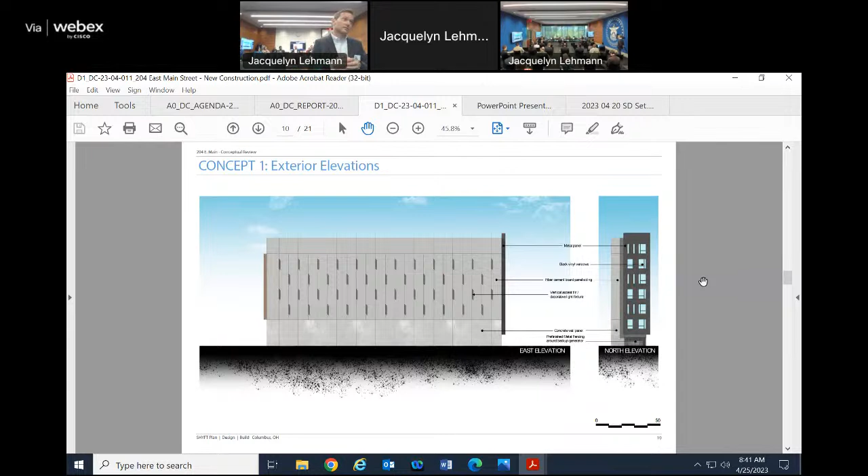So in lieu of being a static art piece, how do we do something here that changes throughout the seasons, throughout the day and night. The next slide would show a visual representation of how we could utilize different lighting concepts to activate this facade at night. The daytime view doesn't show shadow and depth, but this was the initial concept thought on that eastern facade where the firewall is.

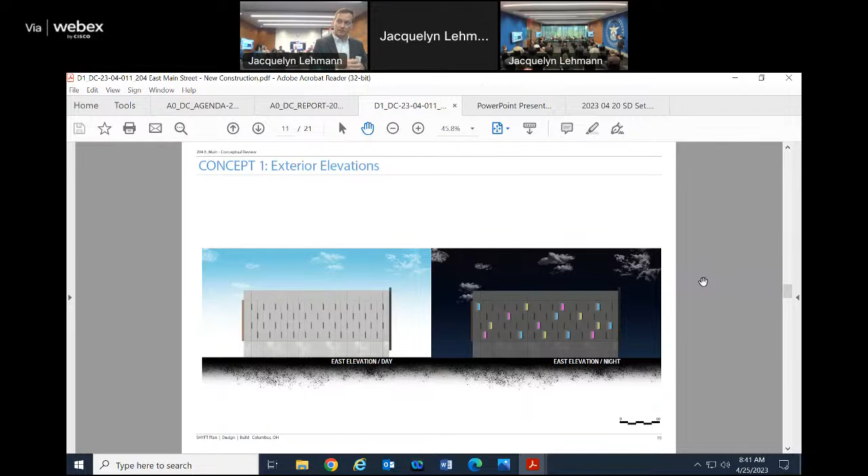This one utilizes a different rain screen that would be over top of the main building facade, basically pulling up and away from the building. This would be utilizing a series of composite materials - I think this would be a black composite type wood that's being pulled up off of the lighter fiber cement board underneath.

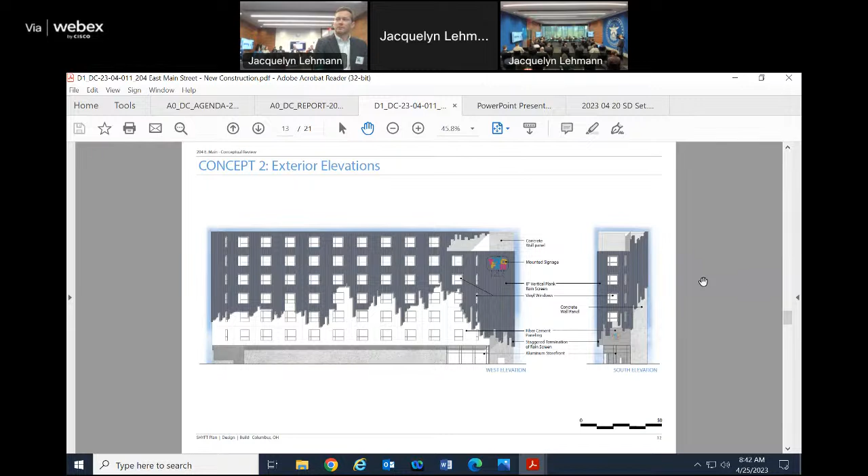As far as the building facade, concept, and how this is situated - it's the exact same floor plan, same 50 to 60 units available here, with the same location for amenity spaces on the upper floor and storage space on the lower floor.

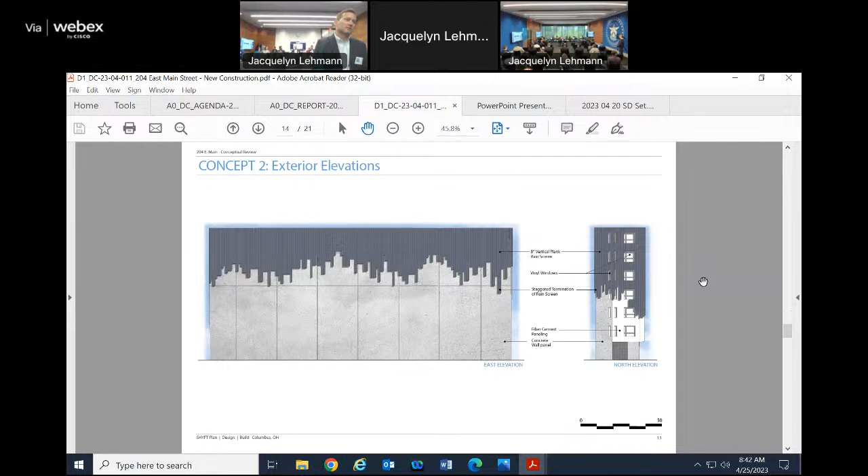This facade is again using the veil pulled up to try to create some sort of visual interest on this facade. And this had a similar application for the night view where we were looking to utilize lighting to try to activate that facade.

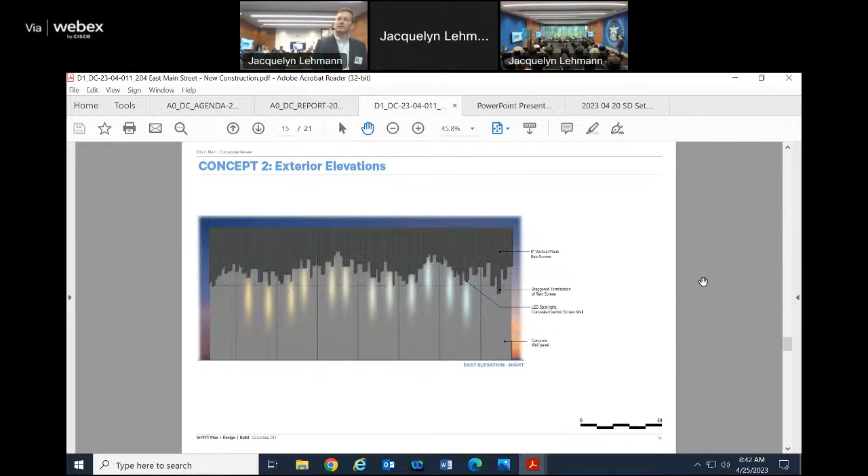Next slide. Another rendering of that view. And then these are just basic floor plans as you go up to the building.

Based off of staff comments, there were a couple additional items we wanted to comment on. On the first floor, speaking with our client, they would be plumbing this so that retail would be accessible at this level at some point. Knowing that Young is an alley, making sure we get safe pedestrian access and entrance off of Young Street would be something we'd need to work through. But the plan all along was this first floor space would be set up so it could be utilized for retail space and or storage.

I have already forgotten the second thing I wanted to mention based off of the staff comments. I have a question about what you just said, if that's okay, if I could ask that now.

Yes. It was interesting because when I looked at the plan, it looked like on that ground level floor, if you pushed those storage units back to the east wall, then you would have a corridor in the front, and that would allow you to maybe have some punched openings or even brick glass or something where you could activate that level. But it sounds like you have them at the west facade because you have that potential to use those as commercial space.

Correct. I do think in the upcoming months, in collaboration with staff and our client, we could work through an amenable solution where we might solve the pedestrian issue by pushing into the eastern facade, creating additional pedestrian access along that western component too. So yes, the plan was for that lower level to create some sort of amenity spaces and or retail. Other questions or comments for the applicant?

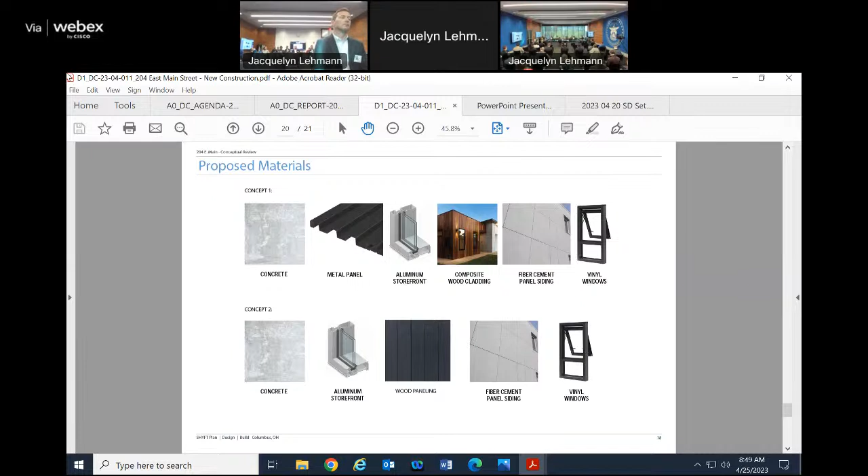And then on the west, if you decide you're not going to have retail, or the retail isn't accessed from the front, think about strategies where you could enliven that strip on Young. Because even though conceptually it's nice to have that monolithic base, in actuality it's a prominent facade and it's long.

So I think we want to have some kind of transparency there. Yeah, and I remember now what the second staff comment was, reacting to the comment about the eastern facade and us looking to activate it using something more integrated into the architecture, in lieu of a more static applied element, which is where we were trying to work with it. Our hope would be, in working with staff over the next several months, we could make sure we have a solution that would be acceptable to the commission.

Where's the right of way line on Young Street? Is it on the curb face or is it 3 feet back? I think it's 3 feet back, but I have to go back and look.

So you're proposing to put a bunch of plant material within the right of way? I know we were at the alley, and I unfortunately don't have that at the top of my mind right now. I know we've looked at the right of way line and the fact that we're coming from the middle of Young Street, but I can't remember exactly where that right of way is.

Yeah, I think to move the concept forward, you've got to figure out where that is and get with DPS. Yeah, we met with Structure Point previously to look at this as well, so it should be a relatively quick answer. I think we have looked at that, I just can't recall off the top of my head exactly where it lies.

Okay, very good. Are there other comments, thoughts, questions, anything? I was gonna add what Bob was getting to, that I think the lot line might be a hindrance on putting fins in, in theory. So at that point, we might just push — I prefer that — but otherwise it might be more of an artistic application.

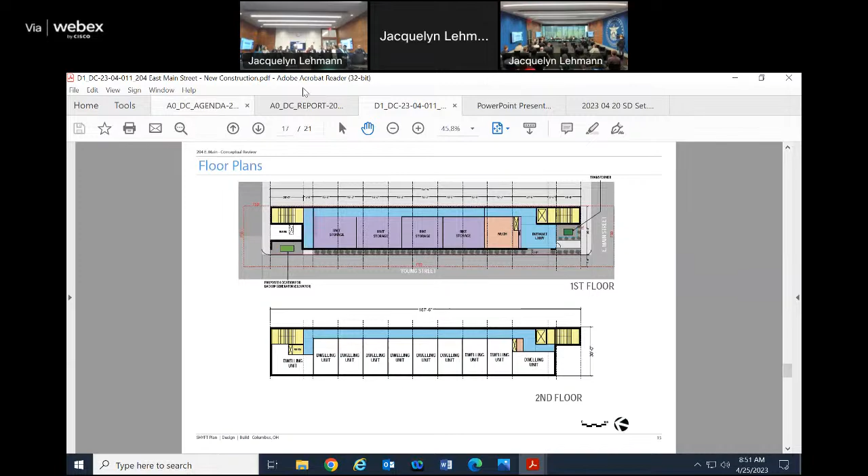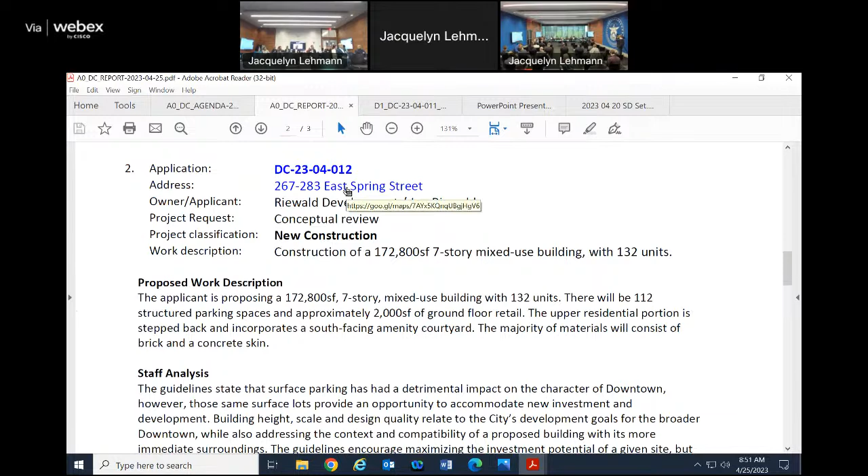Next case is at 267, 283 East Spring Street.

Pull that up here on the map for you. It is this surface parking lot at the intersection of Spring and Neilston. It extends to these two areas here. This that looks grassy is now gravel, but it does stop right here on the South Lafayette.

The applicant is proposing a 172,800 square foot, 7-story mixed-use building with 132 units. There will be 112 structured parking spaces and 2,000 square feet of ground floor retail.

The upper residential portion is stepped back and incorporates a south-facing amenity courtyard. The majority of the materials will consist of brick and concrete skin.

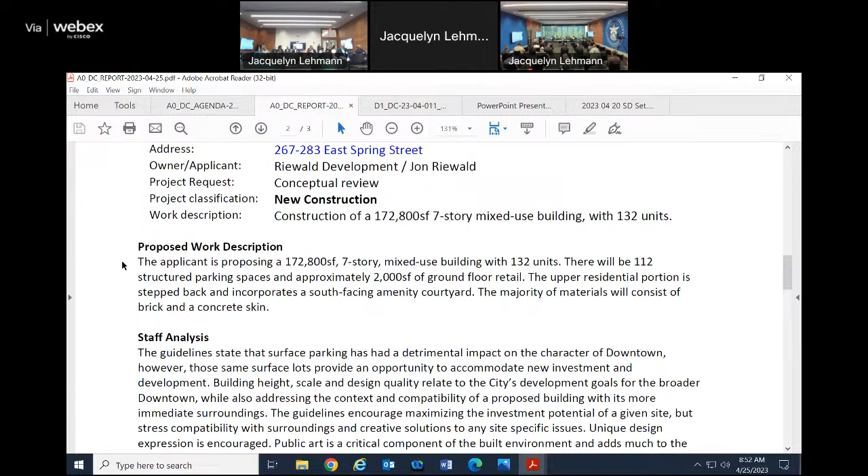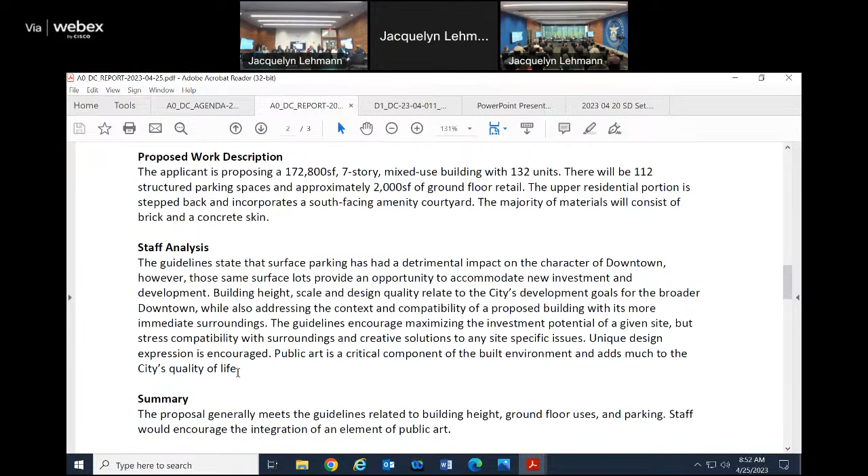The staff analysis, for the most part, is the same as the previous one, surface parking, and our development goals. I will say one additional thing: public art is a critical component of the built environment and adds much to the city's quality of life.

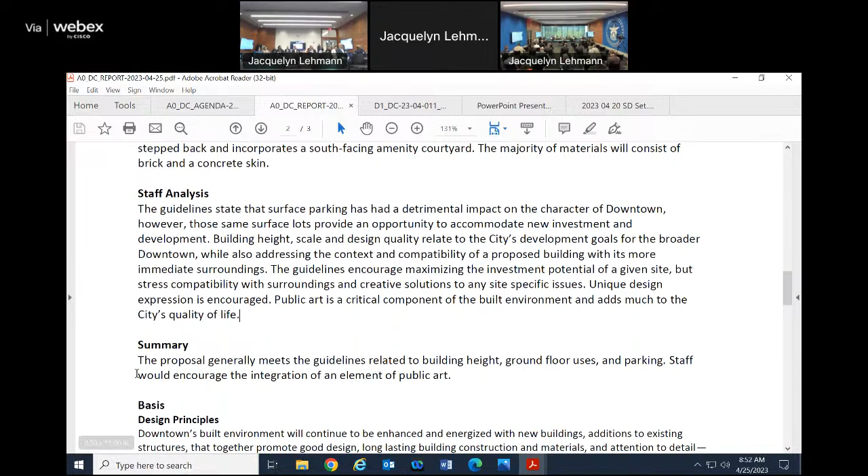So the proposal generally meets the guidelines related to building height, ground floor uses, and parking. Staff would encourage the integration of an element of public art in the proposal.

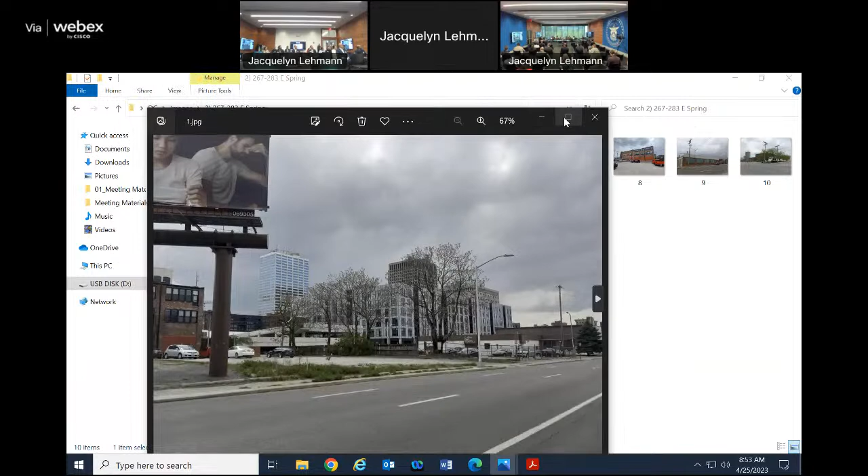And then I did take a site visit. I'll pull it up here. So this is the site looking southwest. See, it's this lot here and this lot here that's fenced in.

With that, we do have an applicant who's here to present.

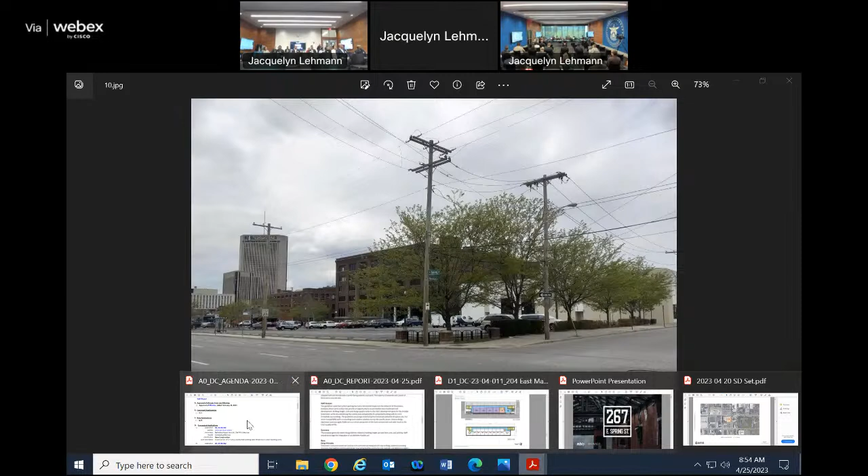Morning. Could you identify yourselves for the record, please? Yes, Jon Riewald with Riewald Development. And Mike Siriano with MBBJ. Great. Would you raise your right hand? You swear and affirm that the testimony you're about to give is the truth, the whole truth, and nothing but the truth? I do. I do. Thank you. How do I spell Siriano? S-I-R-I-A-N-O. Thank you. Okay, very good.

Awesome. Well, we're excited to be here and share more about what we're planning on Spring Street. I want to set the table briefly before I turn it over to Mike to walk through the design presentation. This area is really unique in that it's the intersection of multiple neighborhoods.

We've got the warehouse district to the north with its historic character. There's immense potential there and a mix of uses today. To the south, we have the Discovery District anchored by a growing resident base, some institutional anchors, Columbus State, CCAD, and some cultural institutions, and then an emerging entertainment and dining corridor on 4th.

Despite all of these good things happening around Spring Street, for as long as I've been in Columbus, it has stuck out as kind of a sore thumb, and development hasn't made its way there. So we're excited, and we believe our project's going to be catalytic and hopefully spur additional investment on this corridor.

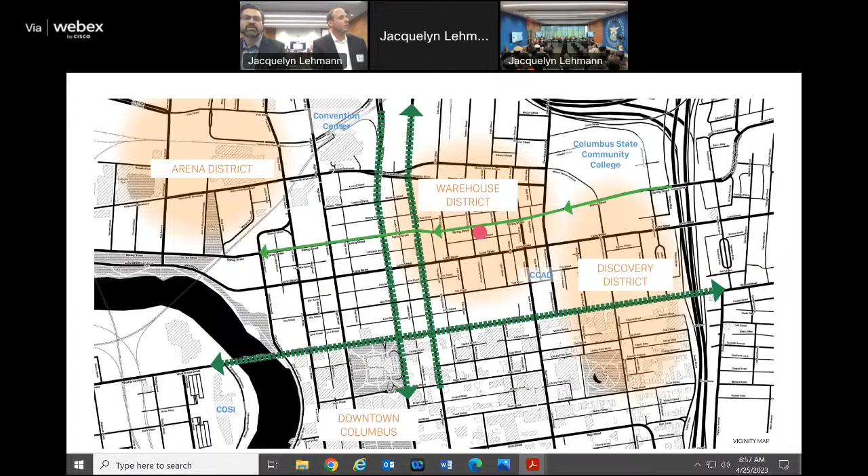This sits just south at the corner of Neilston and Spring. Our site's about 200 feet long by 150 feet deep. We have Lafayette Alley to the rear, and 6th Street is separated by a property to our east.

Go to the next slide.

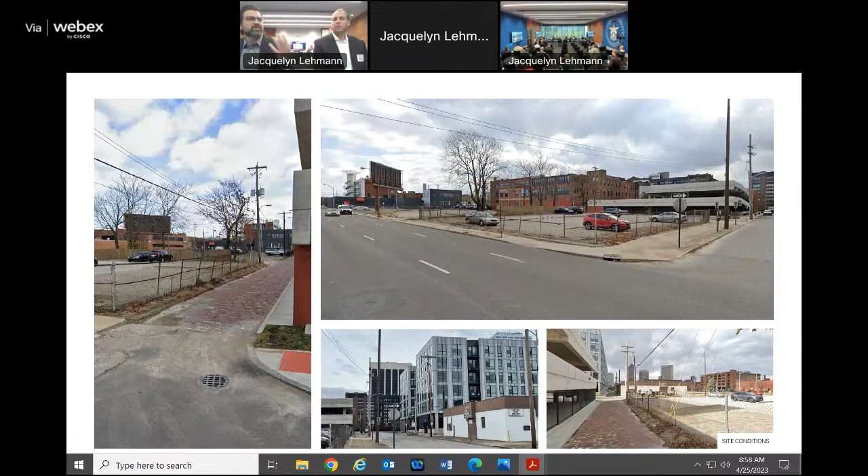Lewis hit these fairly well in terms of context. One thing to note is that being out on the site, Spring Street feels pretty consistent through downtown, running east-west, but at times it can feel pretty unfriendly from a pedestrian standpoint. So one of the things we're looking at, both in the expression of the building and at ground level, helps to alleviate that. I think Neilston feels more comfortable, and that's something we tried to note contextually as we worked through the design.

So go to the next slide.

So I talked about details. In terms of demographic, we're also looking at a more mature customer base, people who see value in this part of downtown, and making sure the architecture and environment reflects that. And I talked a little bit about texture as well.

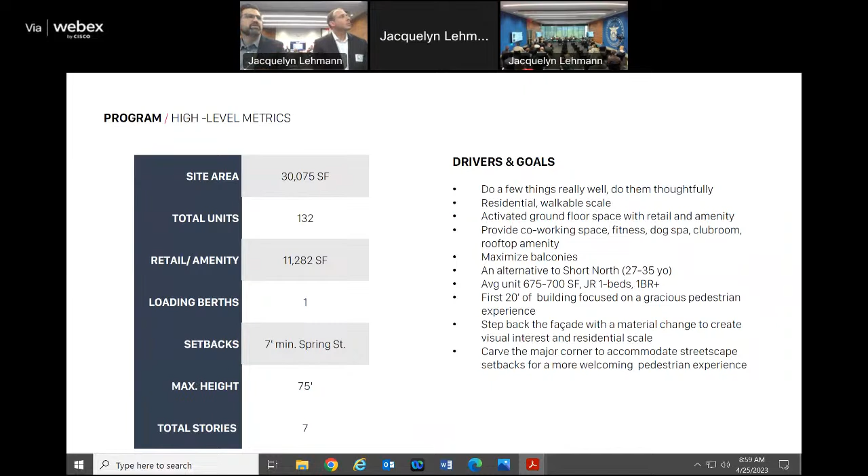John mentioned we're targeting 132 units, 7 stories, and all the code implications that go with that. These are some larger goals. In terms of organization, I'll walk you through the planning.

So we go to the next slide. Sectionally, one major thing to point out, which you'll see reflected in some of the elevational studies, is that we're trying to stay under that 75-foot threshold for high rise.

We have 2 stories of podium, 5 stories of stick frame residential above that, and the building also looks at the extents of a datum. John talked about focusing on that ground level experience and what that does in terms of scaling the environment. So we're pulling some of those units to the property line as we get up on top of the podium, but then pulling the units back as we work our way up, which helps to step the building in section and create thresholds for height.

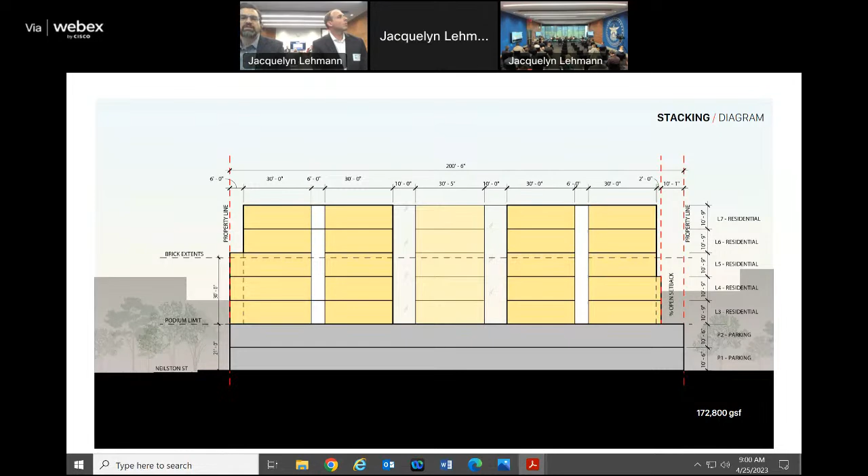So if we keep going - our site, at 200 feet by 150 feet, is pretty tight, especially as we think about maximizing the parking for the units. Right now we're looking at accessing the garage with a speed ramp off the south side, with ingress and egress off of Neilston. In conversations with the city, we want to try to keep curb cuts off of Spring Street, and really focus that for retail, amenity, and lobby for the residents.

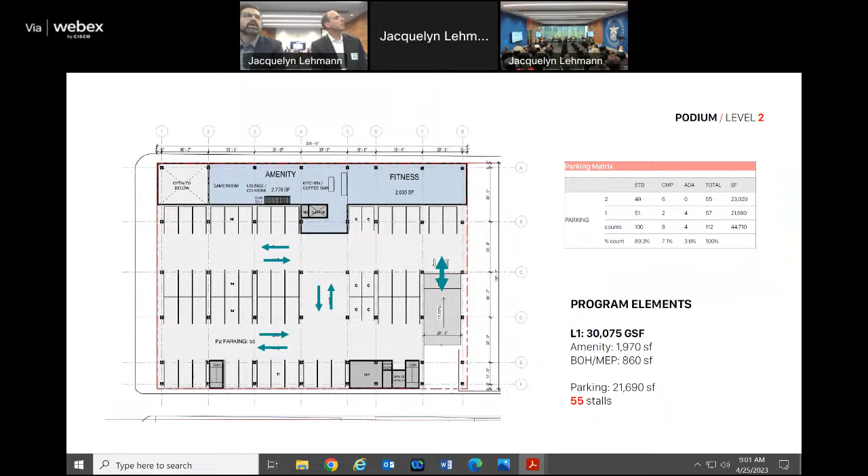Go to the next slide. This kind of works its way up. So that 2-story - we have a 2nd story fronting the garage on Spring, and the 2nd level of the garage. We're looking at coupling double height space as part of the retail, as well as amenity and resident business. You can see in there what I was mentioning before - at the north and west facades, those dotted lines are where the building starts to step back. But in this plan at podium level, we're pulling all the way out.

This unit mix and demising plan is still very early. That's why we're in for conceptual review, so this will continue to get refined as we go forward.

You can see the courtyard off of the south end. Really thinking about sustainability and project typology, simple moves like trying to orient the outdoor spaces where they best relate for our hemisphere. We wanted to preference that courtyard to the south, where it gets the best sunlight to the inboard part of the overbuild.

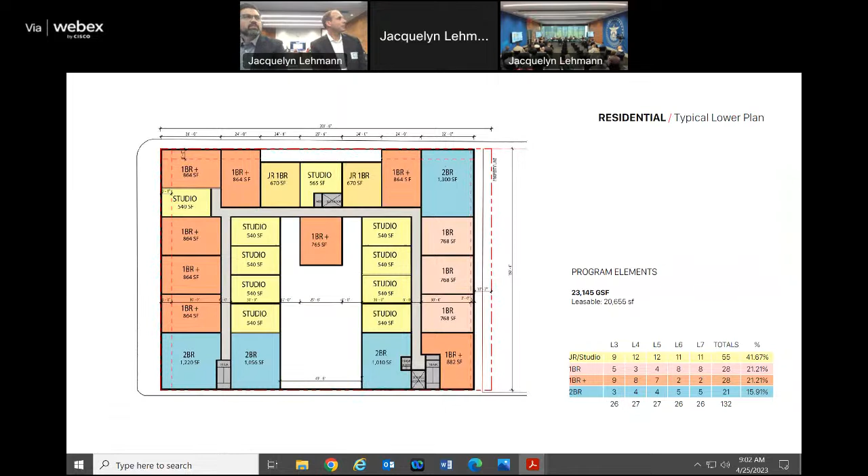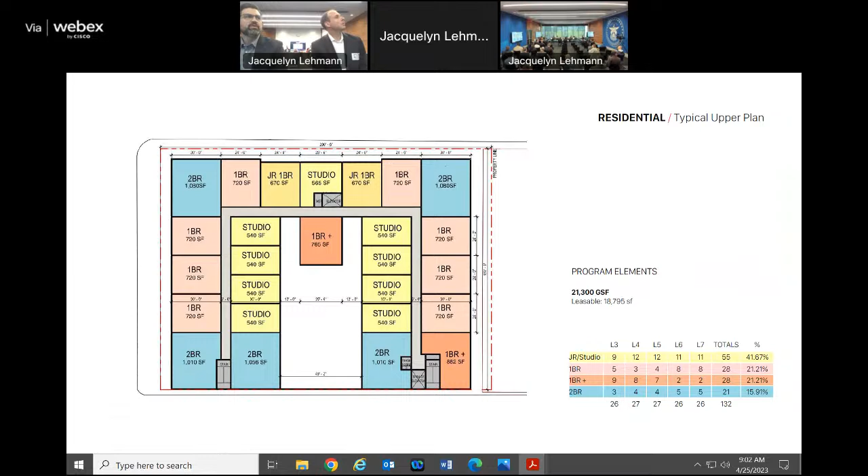As we go up, you can see where the building starts to pull back and step back, creating different moments with regard to how those units are laid out. Continuing to reference different unit types and different opportunities there.

If we go to the expression portion, this is where we started to look at lots of different examples. We're trying to draw contextually off of what's in Columbus and the warehouse district, but also globally what we see in the world. These are examples of color, texture, and different ways of integrating construction types, pairing masonry with something more streamlined above it. These are things we'll continue to draw from going forward.

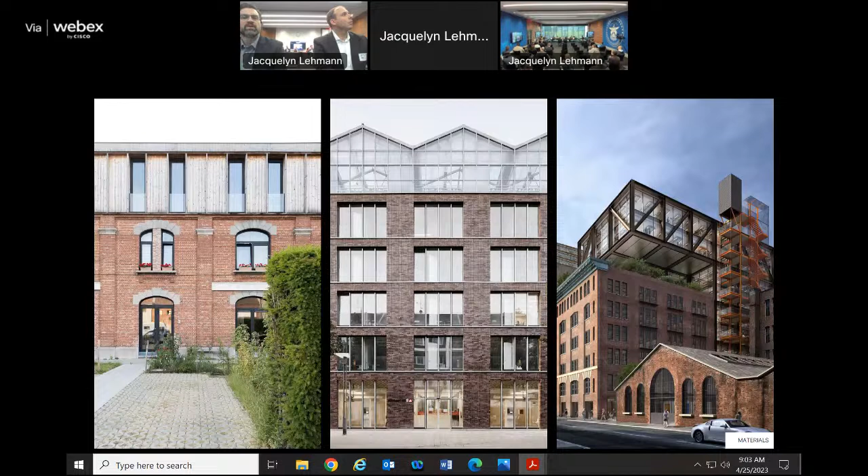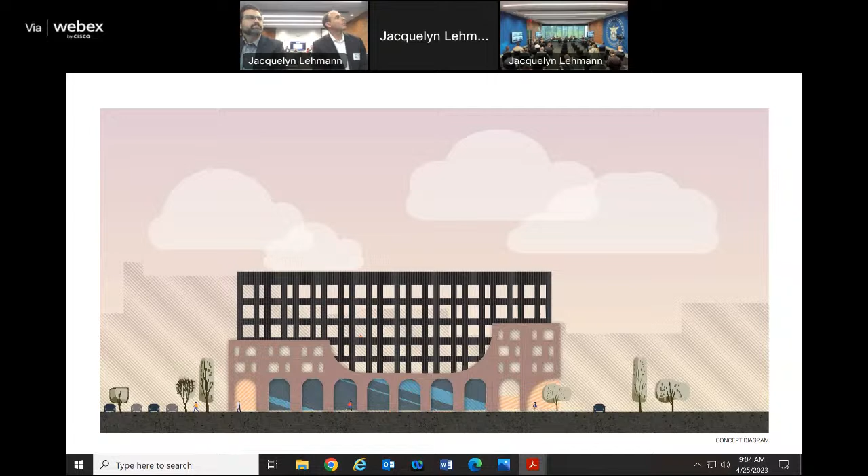Here are some early elevations of how we're thinking of each facade. These continue to be refined as units move in and out and as we discover new things. This language gives us an opportunity to articulate that two-story space in the podium at grade, then leverage smaller punched openings on the first three levels of units, and think about that darker material as it steps back, differentiating how we articulate balconies, windows, etc.

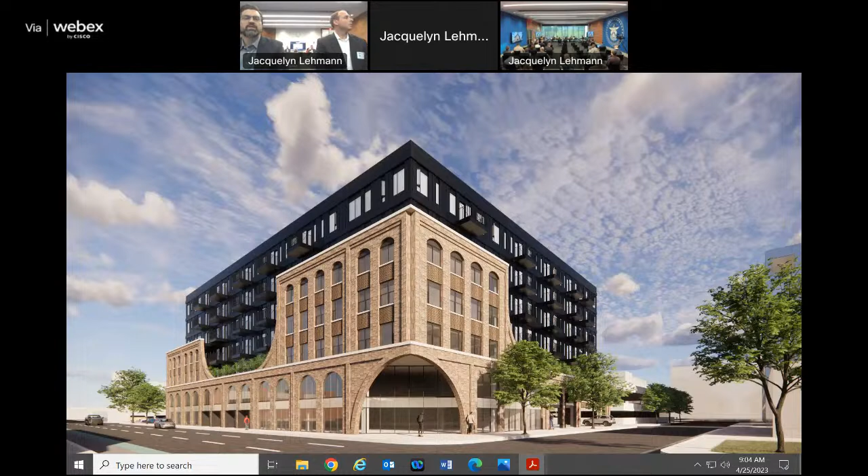These are some early renderings. Largely what we're aiming to do with the ground floor articulation in brick is think about texture and detailing, but also emphasize major moments of entry or cuts—whether for garage, corner retail space, or resident entry—through larger building scale moves. Units more in line with the structural bay become a little more scaled down, smaller, etc.

These are just some examples and close-ups of those details. Still a lot to be done, but I think it's starting to get there in terms of the articulation.

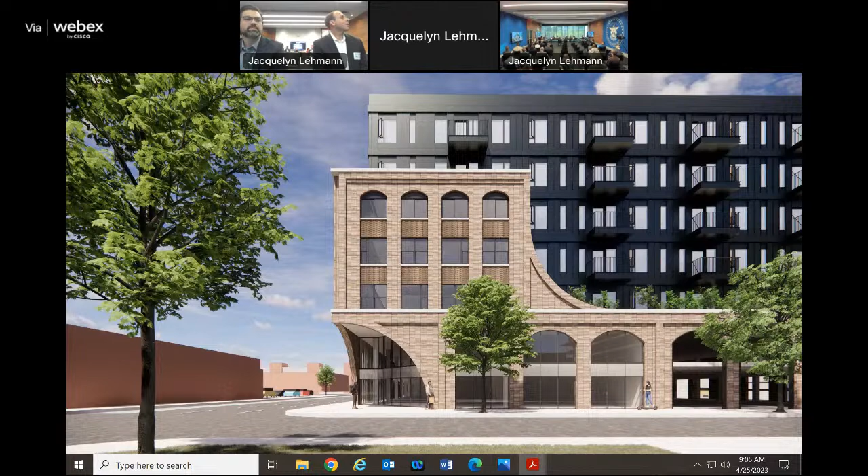That view is Spring Street. You'll notice we have some stipulations with regard to fire because we're occupying that eastern property line—we're limited in the percentage of openings. That's one reason why the building steps back on the east side as well, giving us the ability to do that. Some staff comments were around art and the importance of integrating it there, potentially at ground level on that east facade.

Mike, you said earlier that Nielsen is more pedestrian friendly, but you have nothing pedestrian friendly on Nielsen in your building. The retail is on Spring Street, which isn't very friendly. Maybe it'll get better once we start driving 25 miles an hour, and we'll see how that works. I get that, but when I looked at the plan I reacted to what you said about Nielsen—Nielsen is, and can be, a really nice street.

But all we're going to see is the parking garage. Could you get into the garage from Lafayette? We are studying eliminating that second curb cut. I think ultimately where we land when we're in front of you for final approval will be one curb cut on Nielsen and an extension of that retail onto Nielsen. That's something we're actively studying and I think where we'll land. That'd be great, you just pull it around the corner somehow, maybe.

Yep, absolutely, that's a great comment, Bob. I had a comment, I think two main things that I'm thinking about.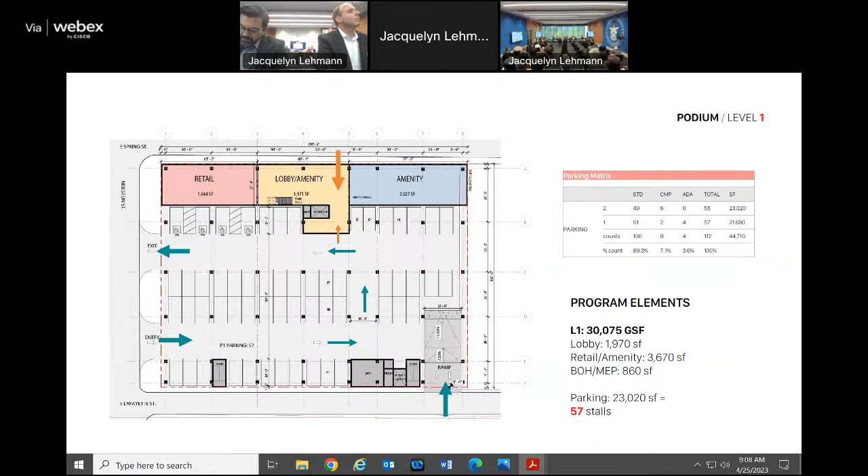Also, because you have your lobby on Spring, is there a way, maybe with your arches, to make that arch a wider arch, or do something to make that more of a focal point or delineate it in some way? You're reading our mind to a degree.

That's another study, that's a very good comment. We're looking at ways we can demarcate and break up the different uses on Neilston at pedestrian level better, with moves, whether it's detailing or differentiation in the storefront. And big picture, when we're in front of you again, we've got the full landscape entourage as well. We're looking at ways to really soften Spring Street and have our buildings spill out here. I agree with you, it's not there yet, but those are some things we're certainly aiming to refine.

And then I just have one more thing, so I'll get it all out now. The building behind, your larger tower -- I understand the masonry portion is very beautiful and really well detailed, and I know if you did too much with the back building it would compete. But even if it's more of a subtle expression, think of it as how would this building be if it were a standalone structure? It can still be subtle and not compete with the masonry, but think of every choice you make as a standalone building, as well as how it looks with the masonry.

And then that connection between the masonry and the building behind, and that depth of the masonry -- what do you want that expression to be? Do you want it to be a wall with glazing behind it, or do you want it to have some sort of depth? So those are the things I'm thinking about. Yep, thank you for the feedback.

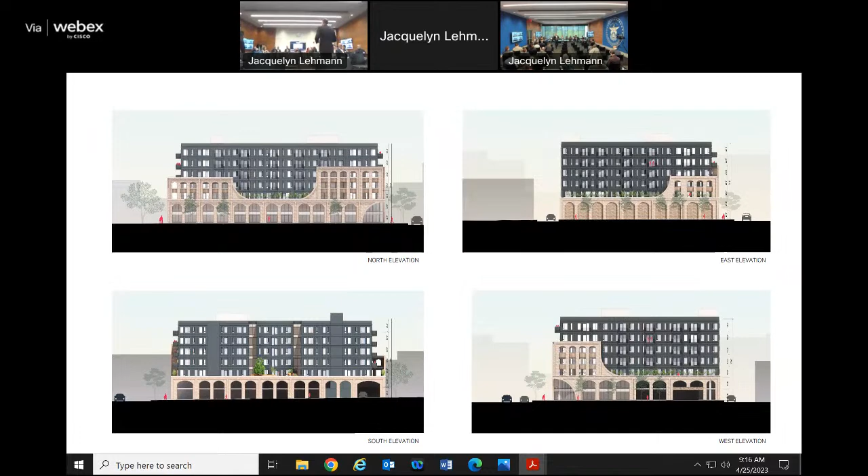Okay, final stage today is also a conceptual review. It is at 175 East Rich.

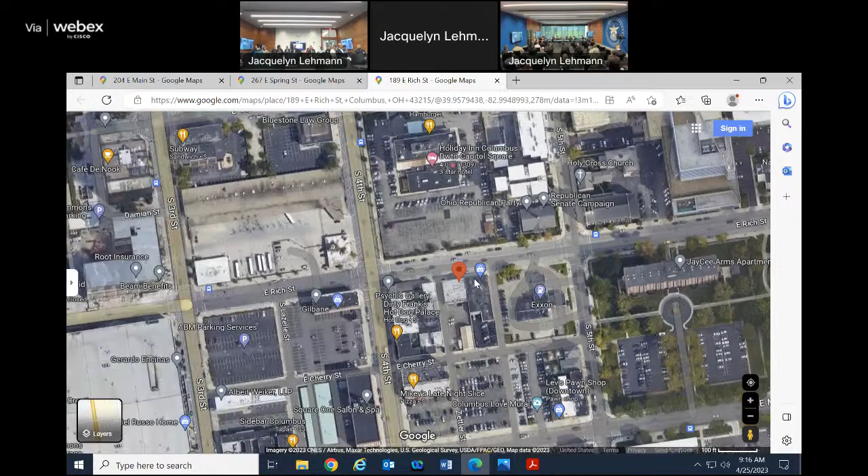The proposal will be more or less from this property line here over to here. So it would include Zettler Street, which they are proposing to vacate, and this would be the footprint of the building that is being proposed. I did do some site visits.

A site visit. This proposal does include demolition of 4 buildings. Here you can see it's this building here, this portion right here, not the taller portion, and then a garage in the back.

See this building, and here's the third building. These buildings, as I indicate in the staff report, were not on the 1921 Sanborns, so they were built at some point between 21 and 51, or whatever the next Sanborns were.

You can see the view looking southeast. This is a view down the alley, Zettler Street, I suppose. Here, this upper portion is kind of where the dividing line will be.

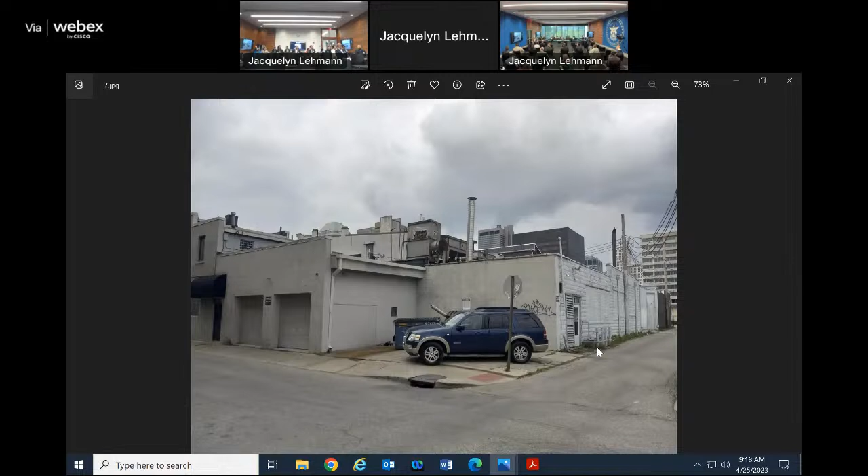So this building right here is what would be demolished. Here's a view of the back of that brick building, and here's the 4th building that would be demolished, this sort of warehouse. And here's the back of the easterly building, with a large service parking lot here.

Here's looking south towards the Harlow. Here's this parking lot. This is looking to the north. This is looking to the east.

Directly to the east is a gas station, see it there. This is looking to the northeast, some development in that area. Directly to the north is the Holiday Inn and a large service parking lot. And directly to the northeast is this site, which I believe is the old Greyhound Center, slated for redevelopment as well.

And here's the building directly to the west. This would be Main. And this is the building directly to the southwest, across from the alley.

So, some details on the proposal. They're proposing a 19-story mixed-use building with 180 units. The proposal calls for ground floor retail, commercial, structured parking, office space, and an amenity deck with a top floor restaurant. It is currently divided by Zettler Street.

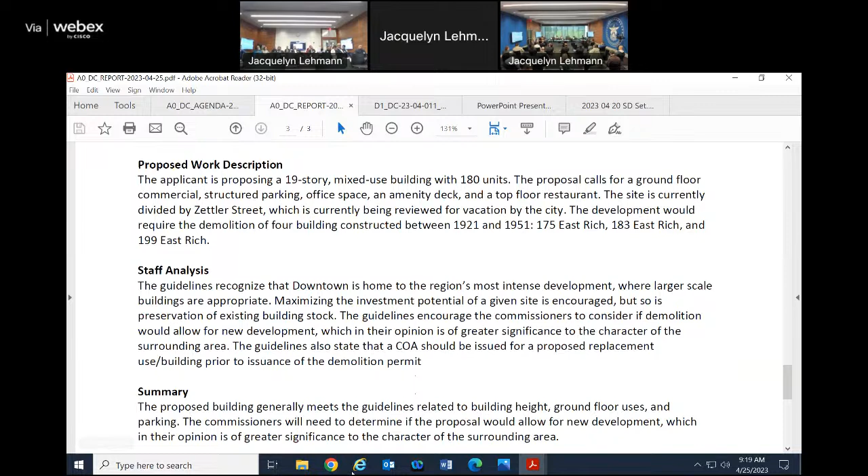As I indicated, that's being reviewed for vacation by the city. The 4 buildings were constructed between 21 and 51, although one of the buildings we discovered last night is actually from prior to the 1870s.

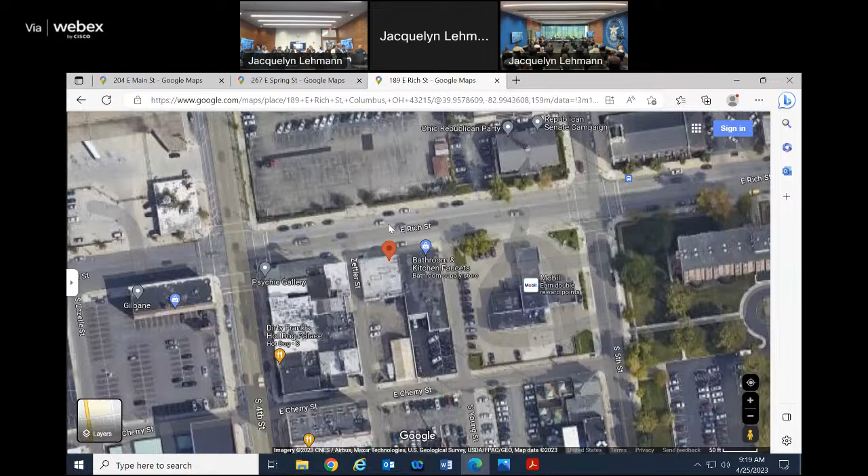It is kind of this taller, older building right here, which is now - I can pull it up and show it to you. It's been heavily modified. It's right there. This building is an older residential dwelling, and it appears on the 1891 Sanborn.

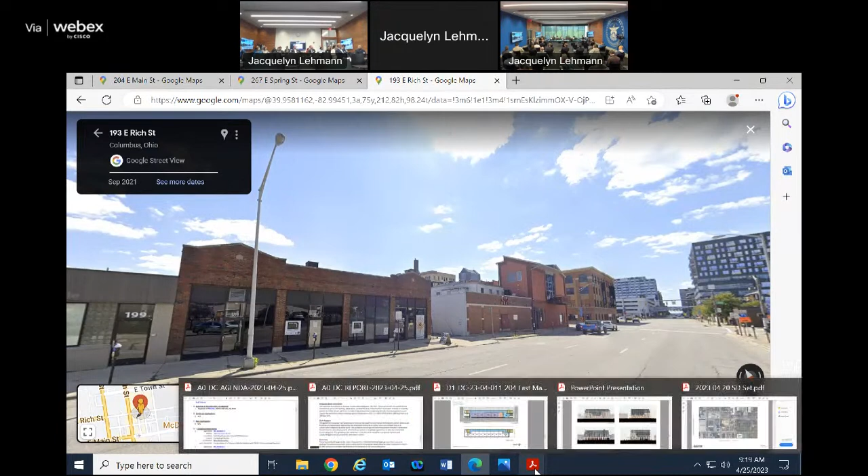1891, I apologize. But it's completely surrounded, and it's been modified, and all the details have been taken off the building.

The downtown guidelines recognize that it's the region's most intense development area, where larger scale buildings are appropriate. Maximizing the investment potential of a given site is encouraged, but so is preservation of existing building stock. The guidelines encourage the commissioners to consider if demolition would allow for new development, which in their opinion is of greater significance to the character of the surrounding area.

The guidelines also state that a COA should be issued for a proposed replacement building prior to issuance of the demolition permit. The proposal generally meets the guidelines related to building height, ground floor uses, and parking. Commissioners will need to determine if the proposal would allow for new development, which in their opinion is of greater significance to the character of the surrounding area.

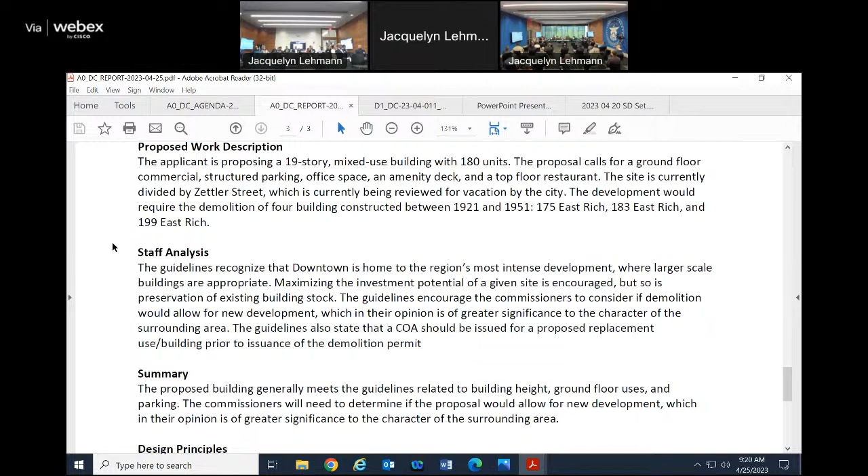And with that, we have an applicant. The applicants, come forward, please.

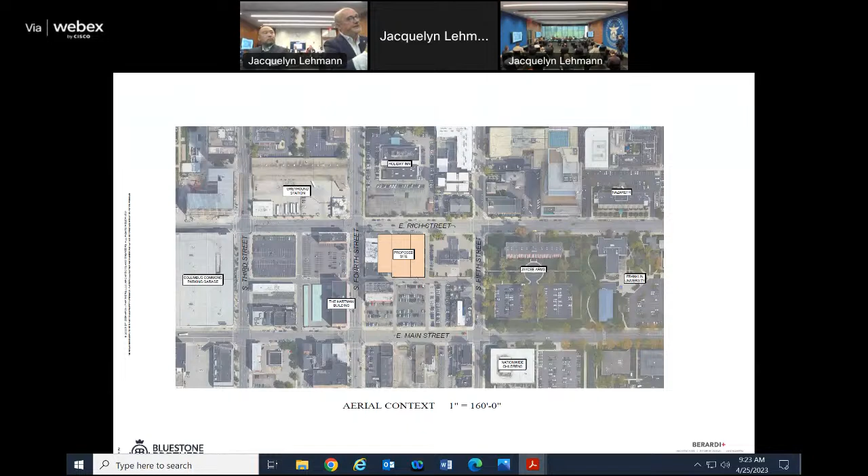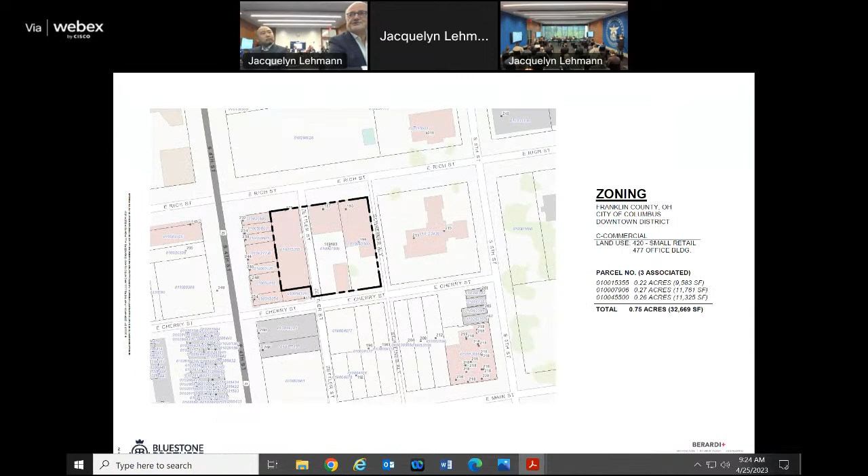The important part is that by removing the buildings behind the existing ones that now face 4th Street, it creates what we intend as a small alley for access to our building, but also provides access to those buildings that now only have access to South 4th Street, be it trash, deliveries, or emergency egress. We're not calling it an alley, just an access passageway that'll benefit everyone. If you look hard at the surveys, every one of those buildings really encroaches onto our property except one.

So we're living with those encroachments, but by pulling our building farther to the east, about 10 feet off of our property line, it creates several things: this passageway, as I indicated, but it also helps with construction as we start building that podium.

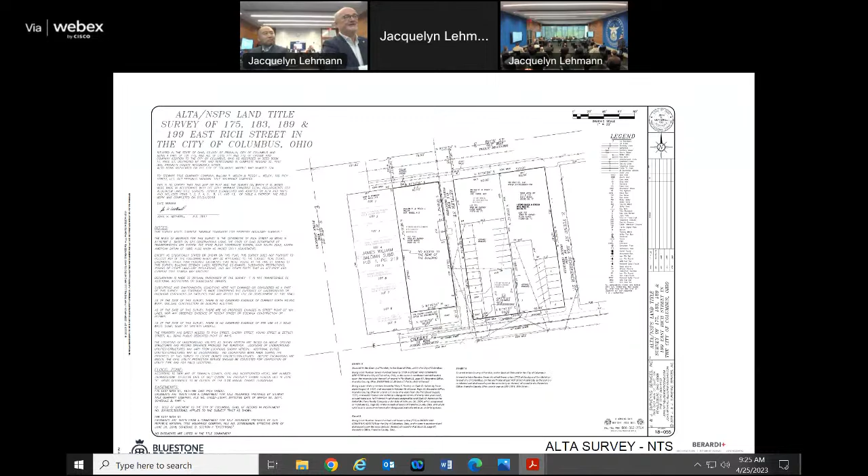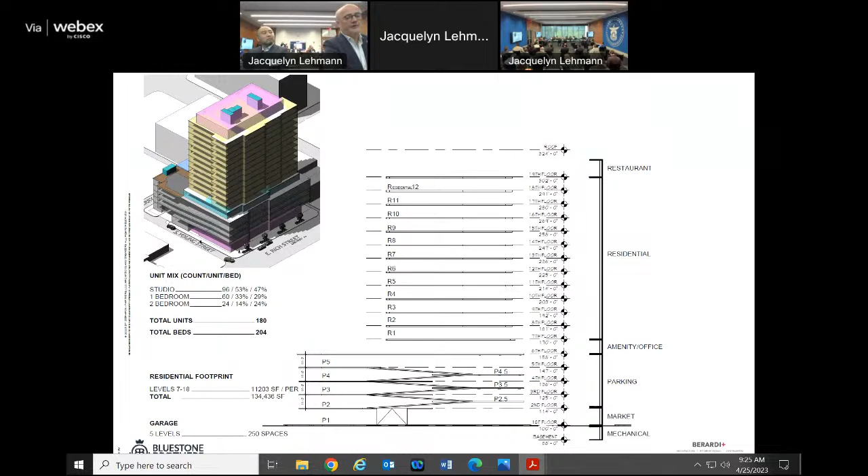We can go to the next slide. The massing diagram is pretty important here because it shows us creating a large podium, largely occupied by parking. The first floor level shows we're populating the street, really reinforcing that idea of wanting to create pedestrian interaction at East Rich Street.

That entire area, at grade level facing East Rich Street, will be commercial space. At this point we're looking at probably a food venue, maybe a small market, so that whole area will be populated in that regard. Probably a little cafe will be part of that space as well. The rest of the building, as you go up to the gray portion, will be a parking structure.

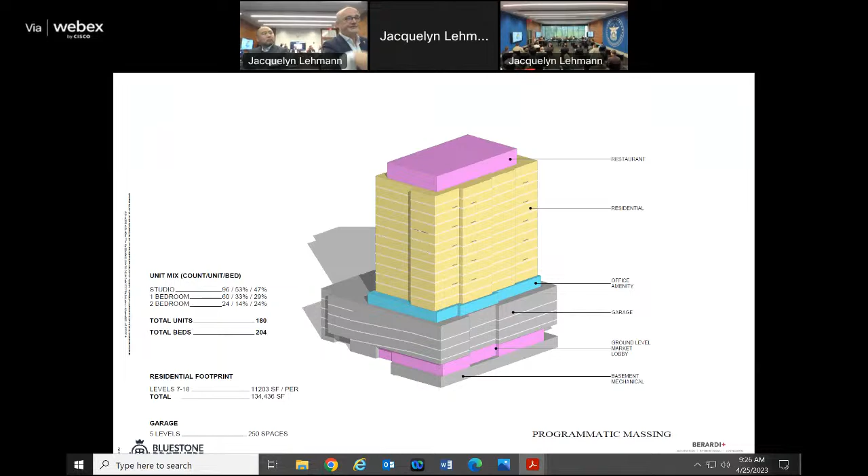Access will be off of Young Street to the east. So we only have pedestrian access on the west side of the property. Vehicular access will be either on East Cherry Street or off of Young Street. When we get to the actual building plan, you'll see where our entrance is, we have some grade level parking together with a speed ramp that takes us up to the upper parking levels. Maybe the next slide.

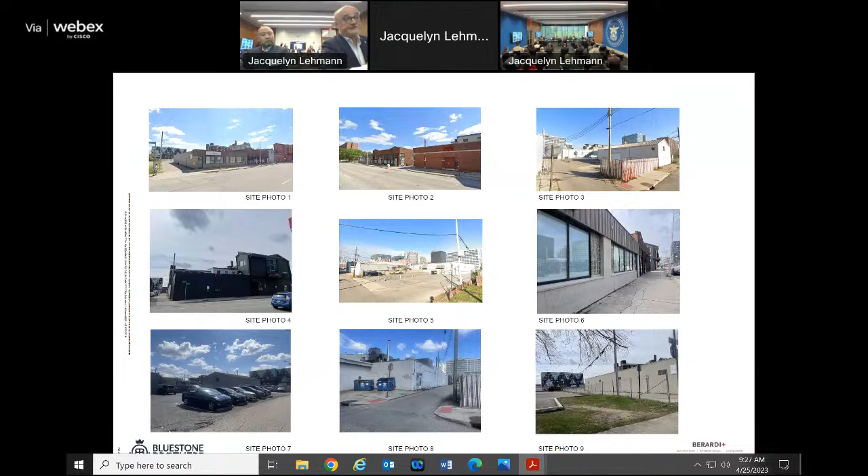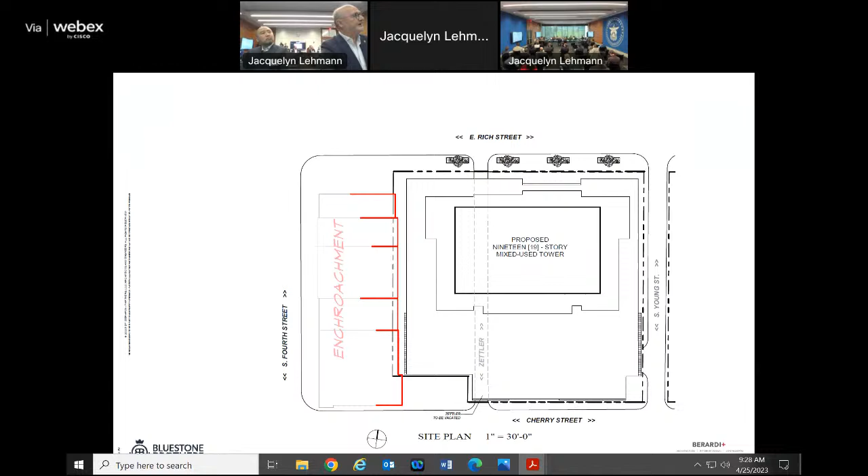And those, when you look at the site plan, if we flip over to the first floor plan, this is the encroachment I was talking about. You can see the red line where they're encroaching onto our property. As we go to the first floor plan, this shows the pink, which is our commercial space. That may be modified slightly, only at the southeast corner where we may extend the lobby space. As I indicated, the passageway on the west side of the property will be created.

The traffic patterns with vehicular traffic will be primarily off of Young Street, on the east side of the property. At the southeast corner, closer to Cherry Street, is where our main entrance for parking will be. That parking area will be at grade level, and again that will be controlled, but it'll only be dedicated for visitors and probably the users of the commercial spaces, to the extent necessary.

We make a hard right once we enter the garage, entering a speed ramp that winds around and takes us back up to the upper levels of parking. This floor plan shows the pedestrian access off of Young Street, as you see at the light blue area with all of the elevators, and also access continuing straight across to where Zettler once was, to our new passageway. So we can move on.

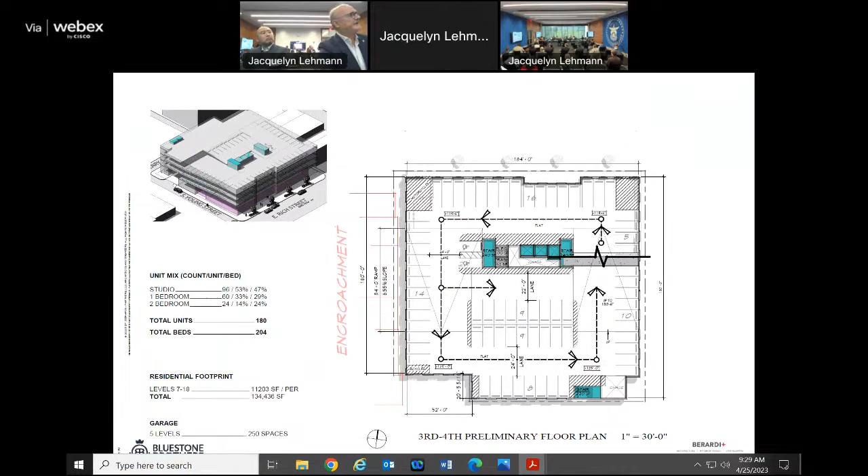We can skip a few slides. These really show the parking arrangement.

The next level that's relatively important to us is the sixth floor plan, which is a combination of office space strictly for management purposes for our own use, together with some co-working spaces dedicated for the residents of the buildings, and conference areas. Additionally, all the areas south of the light blue will be public spaces dedicated to the residents, including some private dining areas, meeting spaces, and the amenity deck, which will include a pool.

And I think you heard before about how sites are being used to maximize our views. We're south at this point, and the pool will be on the south edge. So the entire south edge of that 6-story will be open space, great visibility, great lighting for us.

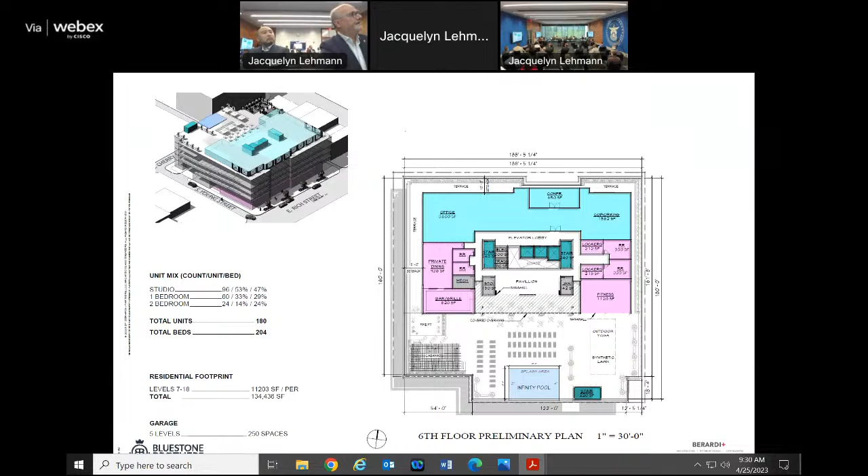The next floor is really stacked. It's a combination of studio units, 1-bedroom units, and 2-bedroom units at the corner. This is basically the residential tower where we have our dwellings.

The top floor, as we mentioned, will be a restaurant or lounge area of sorts. The unique quality of this space compared to other spaces around the city is that it has a 360 view all around the top floor of the building. So at the 19th floor, we have really great views southeast, west, north, and that will be an entirely glazed component.

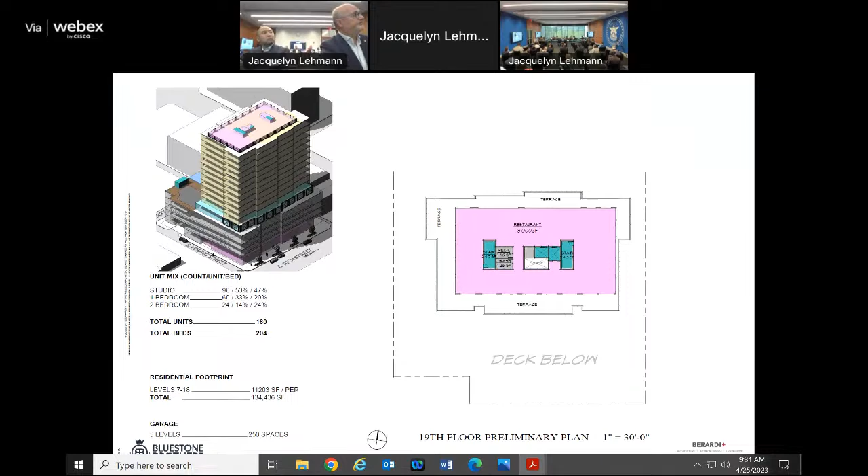Now we can move up to the elevations. We created a fairly strong base in masonry. When we get to the material sheet, we're considering a solid masonry base with a Roman style brick, which you all know what it is. We have some samples here to show you what we're trying to accommodate, and it picks up some different characteristics, arches, maybe from different locations and buildings in the city, but we're really not trying to match anything that's close to us. There really isn't anything nearby to match, or that comes close to the vernacular that's there, so we went on our own.

The tower portion is a fiber cement panel material, together with a Quaker glazing system for the entire building.

You'll notice the X shapes, even on the previous slide. Those will be formed with galvanized steel framework, which is really an expression of a transitional element between the solid masonry base and the lighter tower above it. We've captured that and brought it up to the top at the roof level.

The idea of sloping the roof pitches, which we've done before, is really about capturing the west light. As you look to the right side of that right elevation, that is the west of our building, so it captures and brings in a little bit more light for us.

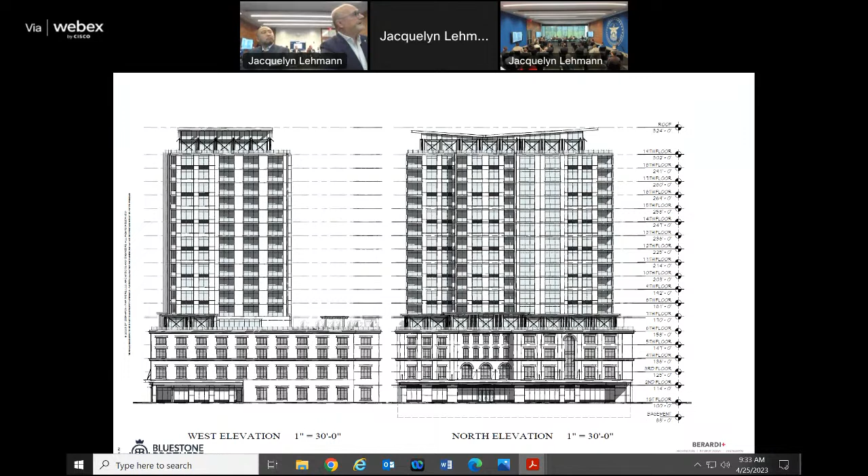Let's see, can we move on and show some of the different images? We don't need the unit plans. This starts to give you an idea of where we are.

This is the material sheet we were talking about. The panel is a Rieder panel that's been used before, a fiber cement panel that works really well for us. It comes in so many different shapes and sizes that on the larger elements, we're trying to allocate those larger panels for those spaces, so we don't have a great deal of joint work.

But anyway, it's a flexible material for us to use in so many different sizes. The Quaker windows, which we've used so many times, will be manufactured to whatever our specifications will be. Our door systems will be the same Quaker product. The rails for the balconies, again, we're trying to create some transparency there as well, with glass rails and light frames. That's really about it. There may be some precast elements that are synthetic materials, but for the most part it's solid masonry, and then the Rieder panels, which is a fiber cement panel, and glazing.

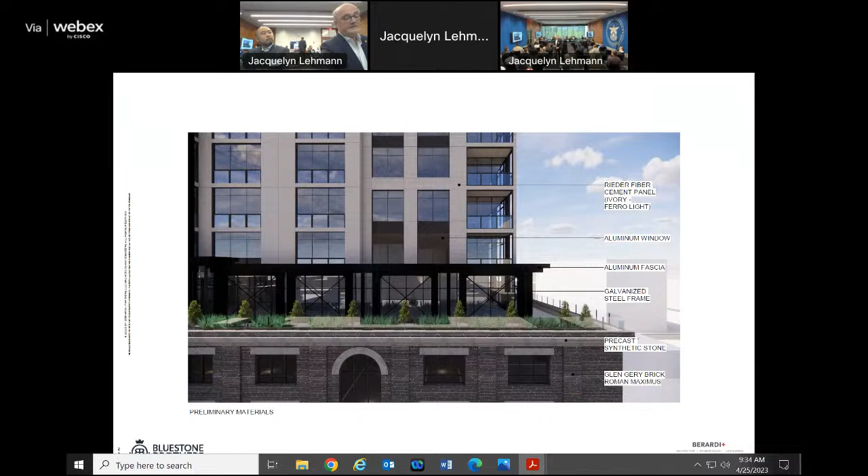So we can move. Questions or comments? Yeah, and I apologize, Steve.

As we looked at it initially, we looked at a darker tower portion, same material. We thought we'd have a different look with that. This is a nice conceptual hearing, and we would encourage tweaking in the process. Again, this rendering is a typical rendering where we're really attempting in every respect to create the transparency at street level all around, populating the street effectively.

And we are working with Realm. They've developed some exciting plans for us at grade level, and they're also working with us on some really truly exciting ideas for the amenity decks as well.

Exciting. Thoughts, guys, comments for the applicant? I have a couple of questions.

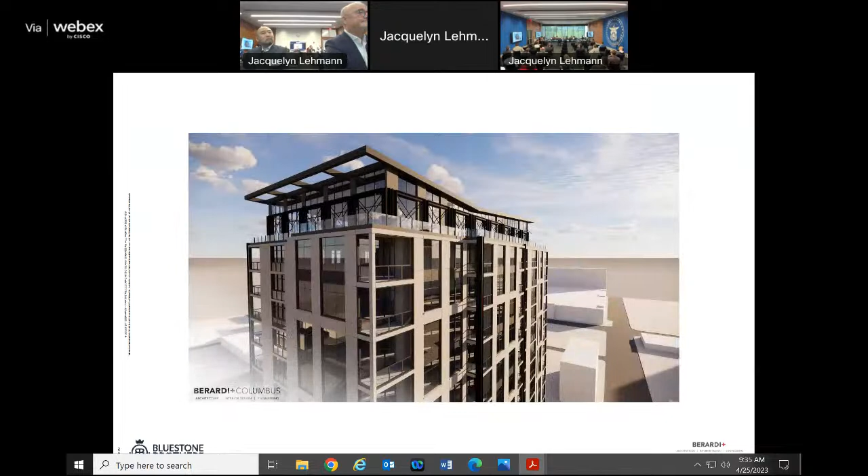I noticed on one of your renderings at that corner, I think it's the northwest corner, where you were showing that column. There was a very interesting column that looked like a large face. I'm wondering if that's an idea you're going to be developing, or if that was just some artistic license for the rendering and you're not going to pursue it, because personally I thought that was wonderful and added so much to the ground level.

I'll tell you where it came from. We were working in Miami with some friends of ours, and I had dinner at Philippe Starck's buildings, and that was a treatment in all the columns, under the garage area. So I borrowed it from Starck. That was just a placeholder.

Okay, but the intent is — I think Stanley can speak to it. The intent is, if you look at that corner, we intend that to be an art exhibition area that we will, in the future, work with a local artist on. So that corner is preserved solely for artist exhibitions. We may do something like what you've already seen, or something else. That's a placeholder though — but a local artist that's gonna do it.

I also wanted to ask you, your residential entry is on the east side, right, on Young Street? And in looking at the plan, that makes perfect sense why you would do that and have a separate entry. But I think as you develop the project, the challenge will be, because you also have some generator there and other equipment where there might be louvers, and then a garage door.

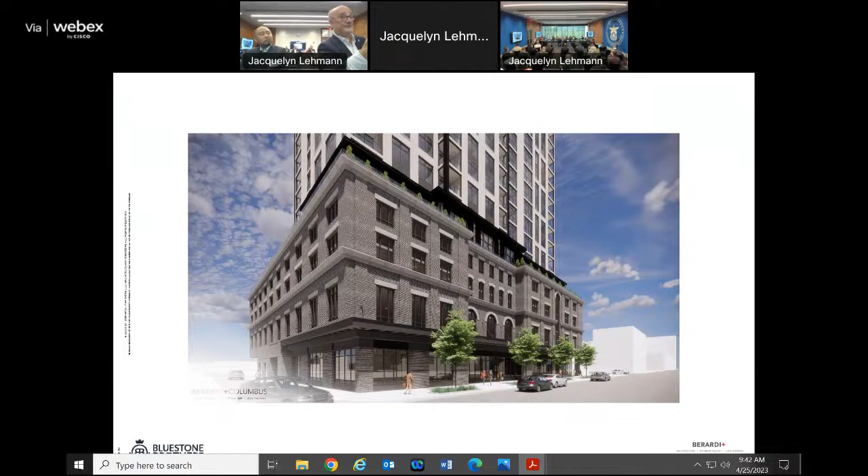But I think the key point is how do we address it so it doesn't appear back of house. Working with Realm, we're coming back along Ridge and turning the bend, actually on both the east and west sides. You might have noticed the sculptural element - that was a fairly large notched, recessed area. We're still investigating those possibilities, but I think the landscaping will do a great deal for us in terms of helping to define that better.

What if you studied making it more of a two-story element, the architecture? Looking at the elevation, it seems small. You're talking about the Young Street entrance - yeah, they could make it a little more grand, in some way, so that if you go there as a resident, you feel it. We can raise that to where it really enlivens that entire corridor as we go south on Young.

Okay, so I think we're hearing that - that's a comment for you. Are there other comments then from anybody?

I have a small one. I like the sloping roof on the top. I would encourage you to make it more dramatic, because I'm afraid that at that height in the air it's gonna get lost a little bit. Yeah, and I think it makes an interesting statement other than just the typical flat roof.

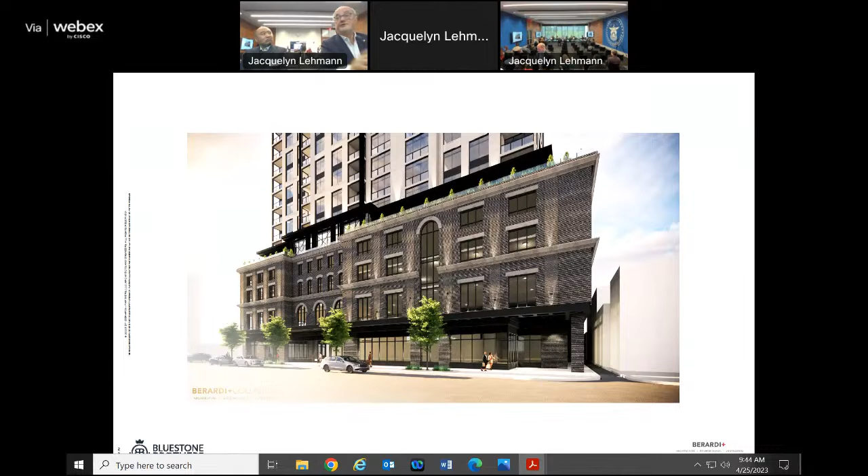Hey Bob, do you do the same thing with the aluminum trellising on top there, to kind of bring it down to the top of the podium? Well, maybe - can you go to the 2D elevation? Yeah, I see what you're saying. Go back to the full elevation, next one. I mean, you pitch these things to kind of pick up on that.

I'd be careful - I kind of like it the way it is. It could be different. I think how the tower meets the sky and that articulation is an element I'd be cautious about - little bits could fall quickly into it being more, but more is not always better. To Bob's point, I think even this view is taken from about 500 feet away to the north, and you do see the slopes quite a bit, but I think that's something worth studying.

And again, this view isn't at grade - it was taken about 20 feet off grade. So if we push ourselves back to the north, maybe in the parking lot of the Holiday Inn, you're not gonna see that roofline, because it's set back. It's worth studying - I think if we pull ourselves to street level, we're not gonna see it. Definitely, you can look at that.

I do appreciate the updates you made to the textures and colors - it just creates more contrast, and it's more vibrant and dynamic. Okay, so it's a positive on that, Trudy.

Are you within the SID or the Discovery District SID? We're in the Mohawk Market District. Okay, so it's not a SID district?

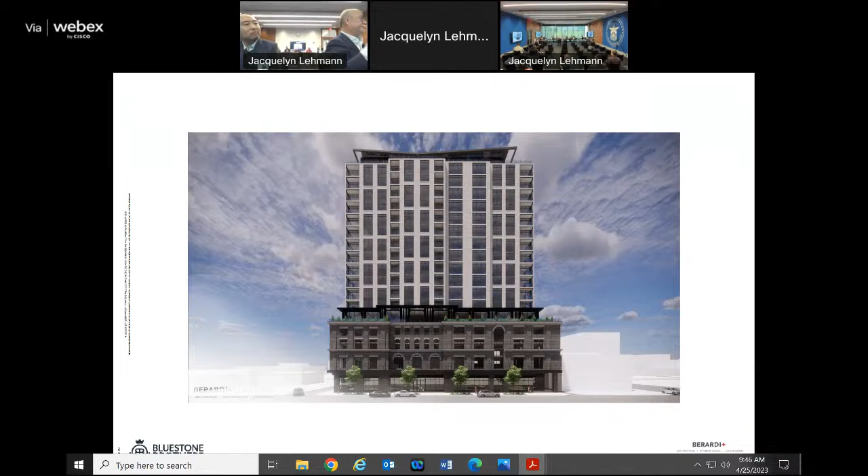Would that be the only residential entrance for somebody walking? Actually, we're extending it all the way to the west, to that passageway. Speaking of lighting, we haven't shown you any lighting study yet, but the lighting is gonna be fairly intense in all these areas. There will be a passage, an entrance.

And then, I don't think you can see them, but it's all controlled with gates and cameras. There'll be quite a bit of storage, I think you've got a comment on that.

Let me go back to the other side of the building where the encroachment is, on 4th Street. What have been the discussions with the various businesses on the 4th Street side as to if that would affect them, with food deliveries and other things into those restaurants?

They are aware of what we're doing and they have no issue. I think what we're doing is try to elevate the whole neighborhood around us. By putting the marketplace in that neighborhood, it will make it more of a mixed use environment. We're not trying to compete with our neighboring restaurants and other businesses. Actually, what we're trying to do is preserve them so that the 4th and Rich Street corridor in the future can be a better serving neighborhood.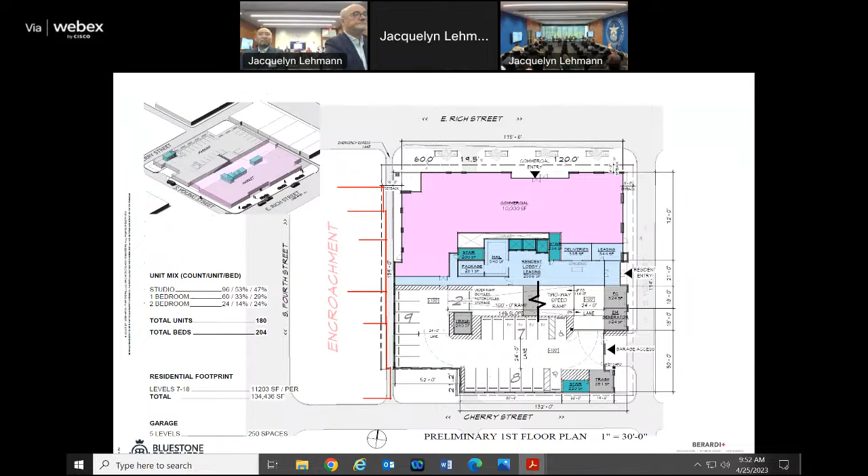I think it's worth evaluating. Okay, so you're going to look at the alley and you've had some comments about the entrance. Are there any other comments in general that people want to throw out?

I think it's awesome, an interesting comment. I love the descriptors on this, Roman brick too. It's very literary, romantic, and mysterious among other things — I don't think we've been confronted with 'mysterious brick' before. I love the pattern thing they put in, that was very interesting. I don't know if you're going to build it that way, but I guess we get to see — that's what the goal is.

Anything from the audience, any thoughts, comments? Anything else from this group? I just had one.

Where the parking is, and where the masonry is, the parking and the windows, the openings — are you intending those to be screened, glazing, or a combination? That's a great question. It's intended to be an open garage.

However, there will be framework that'll appear as though there are windows. I'll give you an example — one of my favorite projects in Sarasota is that way, it looks like an apartment building but it's a parking garage. So we'll do it that way — we'll have some screening, but it'll be open area.

The screening won't just read as black voids — the way you're treating it will give the illusion that it might be glazing or something translucent. Those openings are somewhere in the order of 8 to 10 feet tall. They'll have a lower portion where the screening will be, and the upper portion will be open, so it'll appear almost like open frame.

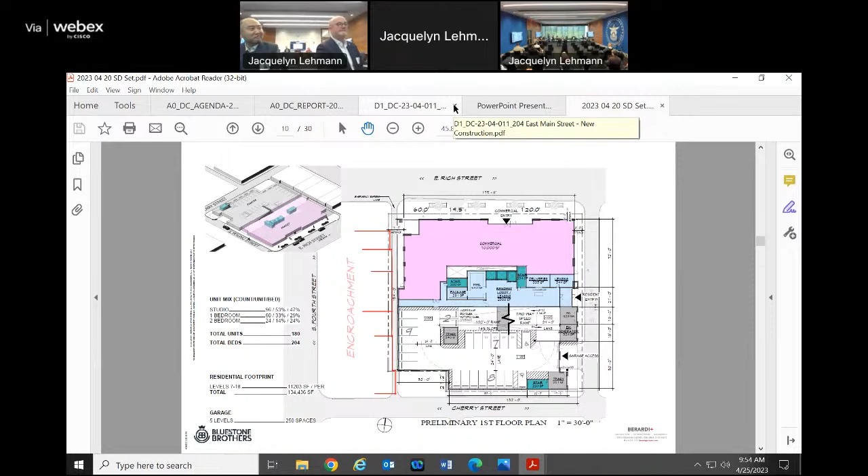Okay, very good. Louis, where do we go? You want us to approve your staff approvals?

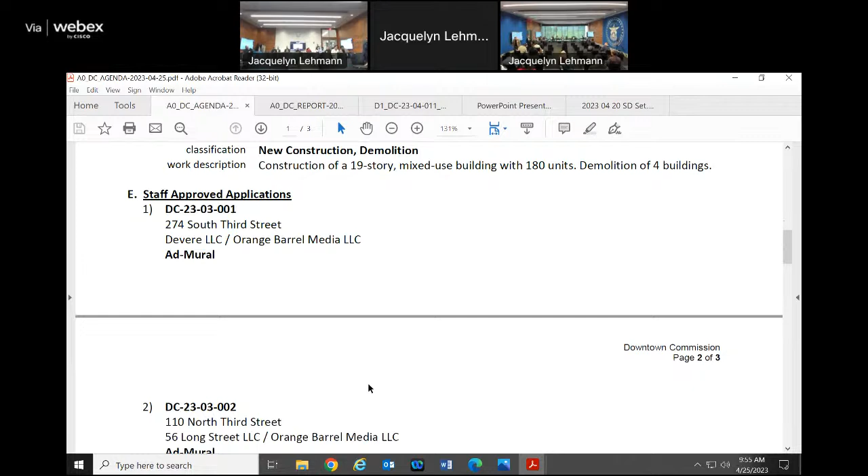Yeah, so we had ad murals, projecting signs, sign refacings, ad murals and signs. Some slight storefront modifications, nothing major, a repair of an existing facade. Some small doorway modifications, ad murals — so 21 cases.

Okay, could I have a motion to approve these staff approvals, please? Thank you. Is there a second? Thank you, Tony. Okay, any questions for Louis on any of these things?

We've got to keep a close eye on him, we don't want him off. All in favor, say aye. Aye. Those opposed? Thank you very much.

Okay, okay, with that being said — you wanted to discuss, I figure while we wait for Bob to come down, you kind of wanted to talk about it. We probably should — yeah, so before we vote, there's been a lot of talk in the media lately about the ice house building.

You kind of wanted to address that or discuss it? Otto's going to take off for a second too. We'll wait for you to come back, Otto — take your time.

So how's everybody enjoying spring? We had a great big frost on our yard this morning. Wow, holy smokes, I can't wait for it. We have a house in Michigan, in the upper peninsula, over the Mackinac Bridge. That's cold country. It was 2 degrees colder here than up there this morning. It was 30 degrees here, and 32 up there.

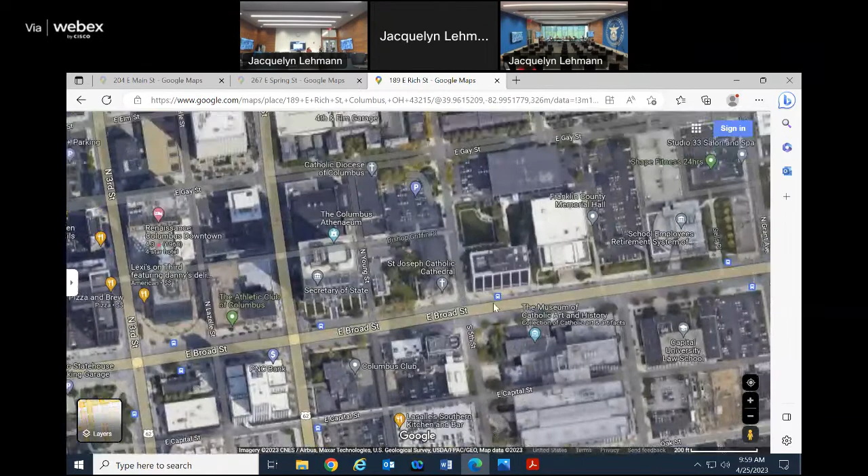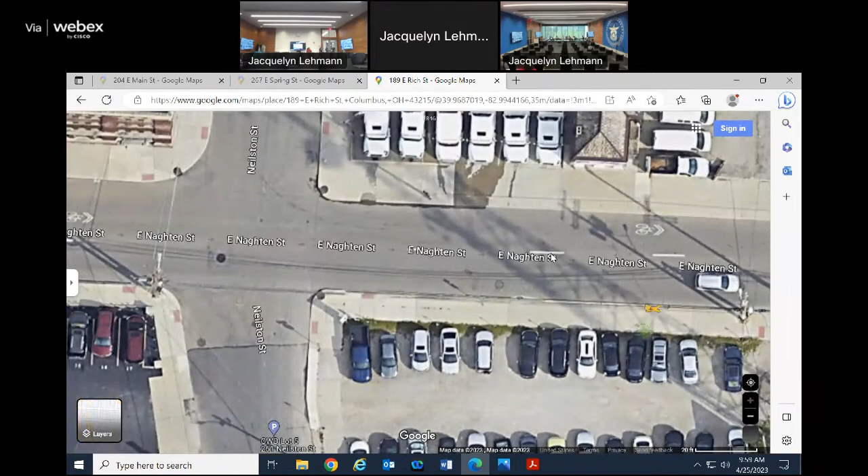Jacquelyn Lehmann did some research for me, she's the historic preservation portion of our team. The front structure was built, I think, 3 or 4 years before the rear structure. This was an ice house, where they would store ice in the wintertime from lakes and stuff, I suppose.

So when that strong windstorm happened, this portion of the parapet wall, because the winds were going east, fell down. If you go out there and visit, there's quite a bit of rubble, and the street's been closed ever since. A lot of bricks and terracotta pieces came down, pretty much down to the top of the windows.

So the applicant requested an engineering study be done, and the engineer indicated that when the building was built, it wasn't done properly. There weren't any connecting metal pieces, I don't know what they're called, that connect the exterior brick to the interior brick. So there's a really strong interior brick structure wall and then the exterior brick, and water had been getting in there, I guess, and it collapsed.

They said the brickwork on the building has had issues, they've been trying to tuck point and stuff, but still that took place. So the city requested an independent study as well, we always do that, just like we did with the main bar. Unfortunately, the result was the same, that the building had been constructed in a manner where the bricks were not properly connected.

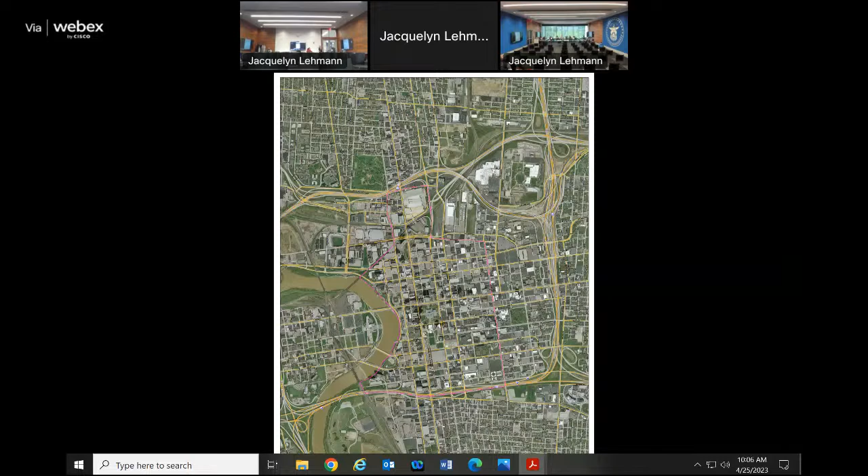Okay, well I guess what we wanted to get to, just so everybody understands, is this did not come to us. And in a way maybe that's good, because we could have been right between a rock and a hard spot, having to decide whether we want to let somebody tear it down.

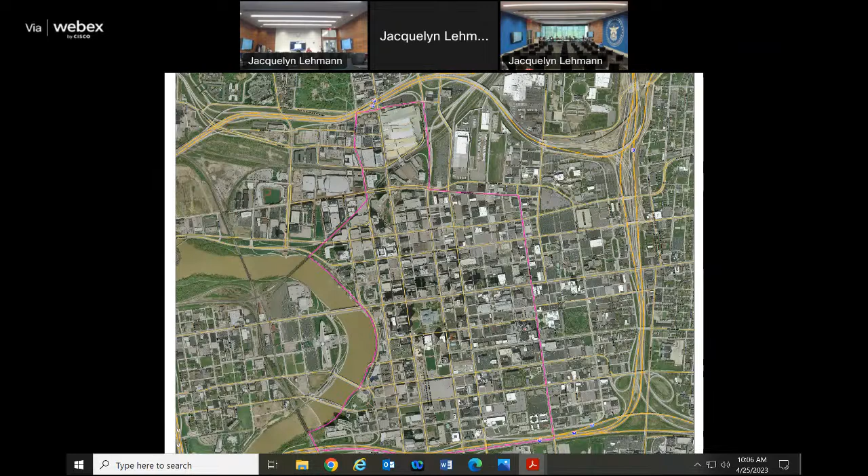And of course, they say they have to tear it down because they can't afford to fix it or something like that. Thank you for bringing that to our attention. I saw it in the newspaper or some clipping, and I said, oh okay, what's going on.

Well, collectively, I appreciate you. Bob's been involved in the conversation. We've been talking with Lewis about this for several weeks.

Bob, I don't quite understand. So I understand where it was shown, where the parapet came down because of the winds, but I don't understand how that's associated with the building adjacent to it. Is that also that building? We're just assuming it's built the same way, so it must be unsafe.

Well, they're not connected. They have not looked to see - is it a different building? They're obviously two wings, two sections. Same building, right? I mean, they were built maybe at a slightly different time. I looked at the Sanborn maps and they don't appear to be very different in age. The facade across the lower floors is all the same, so I don't know exactly what the sequence is, but there are two structures that are independently built, adjacent to each other.

Did you say independently built? Yeah, they were built at some different times. I guess I don't understand why both have to come down, that doesn't make sense. I don't either. It makes no sense to me at all.